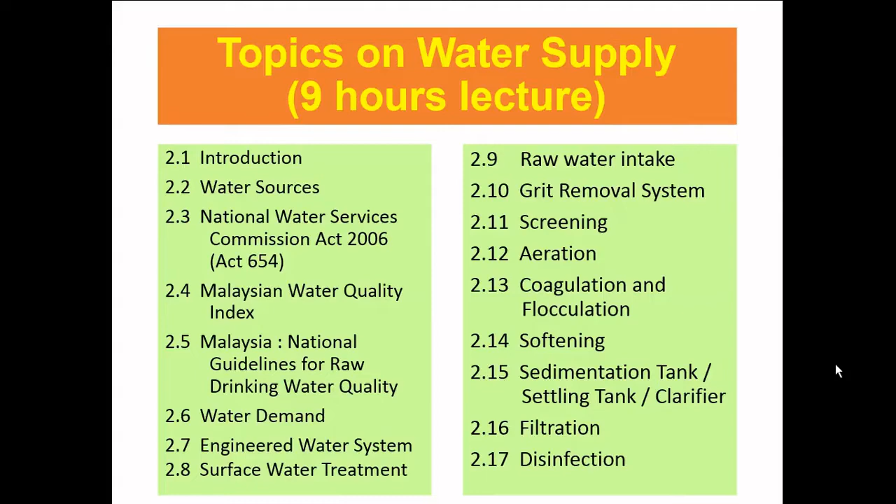So today we continue our new chapter 2 regarding water supply. In this topic we will learn about regulation, standards, and the process of water supply.

Let's see what is meant by 2420 millimeter - it is the depth of water annually, yearly. We will receive about 2.4 meter water depth. If we multiply this with the area in Malaysia, we get million gallons of water sources from the rainfall.

Malaysia's water status is diverse, increasing, and competitive. However, for future forecasting by SMHB Engineering Sdn Bhd, water supply demand cannot be met in many locations, due to climate change, human factors, and degradation of raw water supply catchments due to uncontrolled opening of forest areas.

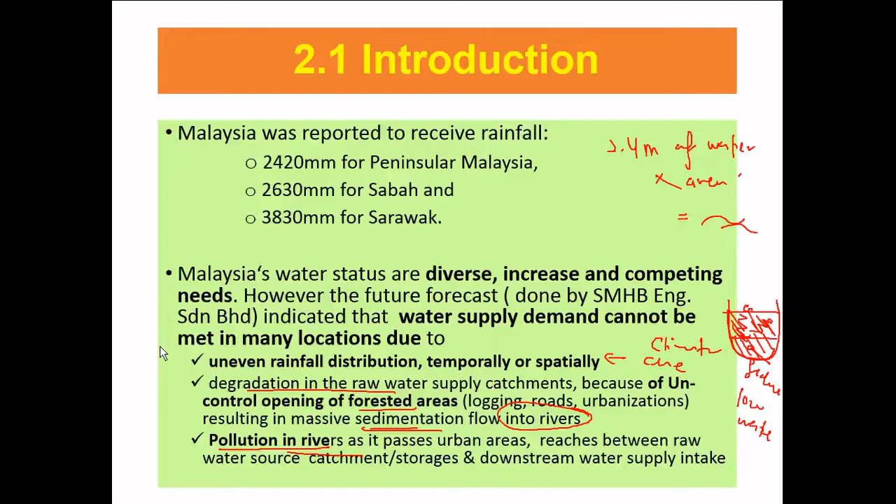In Malaysia, the water crisis happened in 2014. Nowadays in Selangor, I think every year they have a water crisis, regarding river pollution. Treatment plant shutdowns happen due to contamination from river pollution or water intake issues, resulting in low water quality.

Meteorological background - lack of rainfall in the catchment area. This is usually due to climate change.

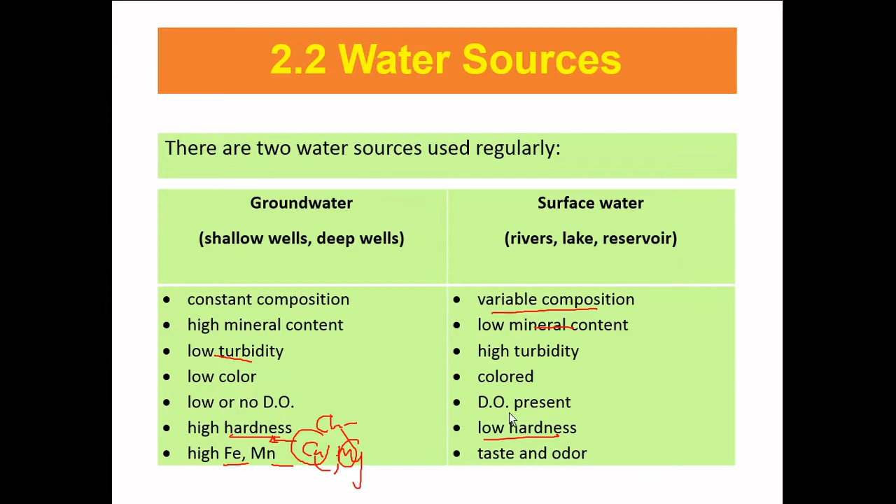So what acts include the water supply? In Malaysia we have Act 2006, Act 654. This act was enforced on 1 February 2007 by the Ministry of Energy, Water and Communication.

Before this, previously in 2007, now we just have KASA, Kementerian Alam Sekitar dan Air. The act was enforced, and the body responsible for this act is SPAN, Suruhanjaya Perkhidmatan Air Negara.

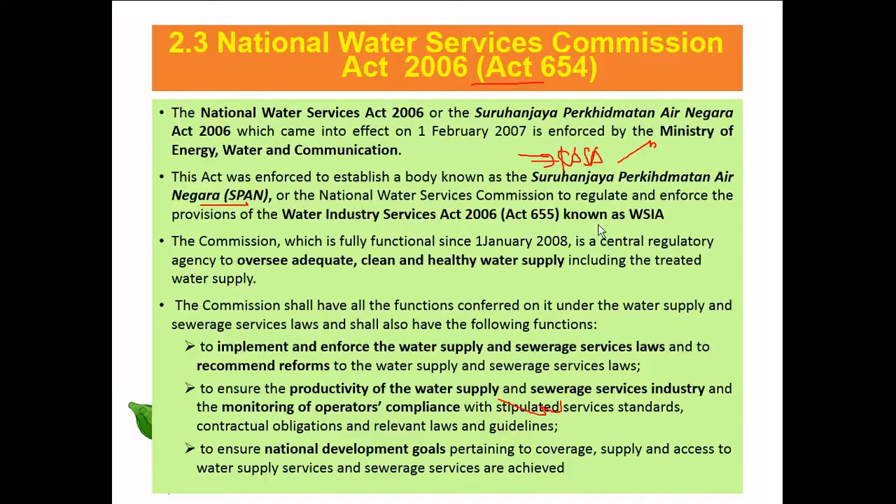The National Water Services Commission regulates and enforces the provisions of the Water Services Industry Act, known as WSIA. The commission fully functioned in January 2008, when this act came into effect, and the body SPAN monitors everything related to this act.

This is the central regulatory agency. The main purpose of this act is to oversee the adequate water volume and quality. The commission should have functions conferred under the water supply and sewerage service, involving two things: water supply and sewerage, ensuring the two important things, quantity and quality.

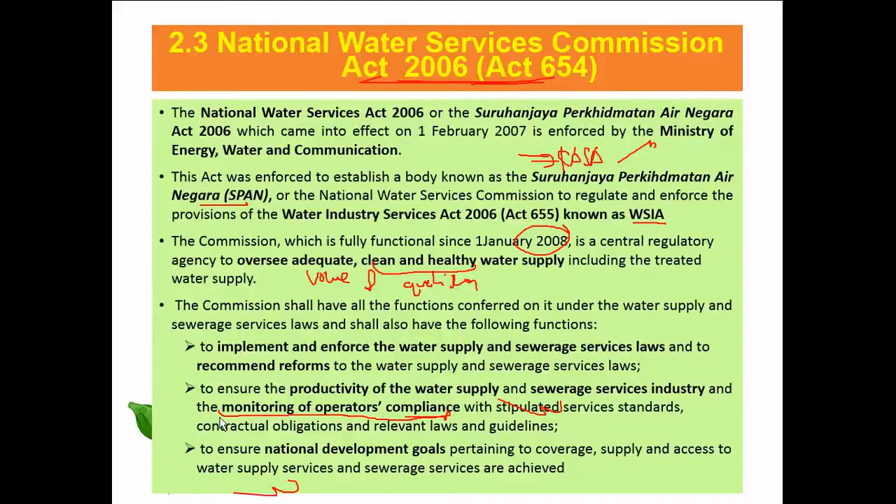Another function is to monitor operator compliance, meaning the tasks or jobs for water supply and sewerage, such as IWK and Syarikat Air Johor, are included in this act. Another purpose is to ensure national development goals pertaining to water supply coverage and access to water supply services are achieved.

WSIA, what is the purpose? To ensure uniformity of law and policy, to make proper control regulation for water supply throughout the Peninsula, Federal, Putrajaya. It doesn't include Sabah Sarawak, they have their own act regarding water supply. Three main subsidiary legislations included are water service industry licensing, permit and exemption.

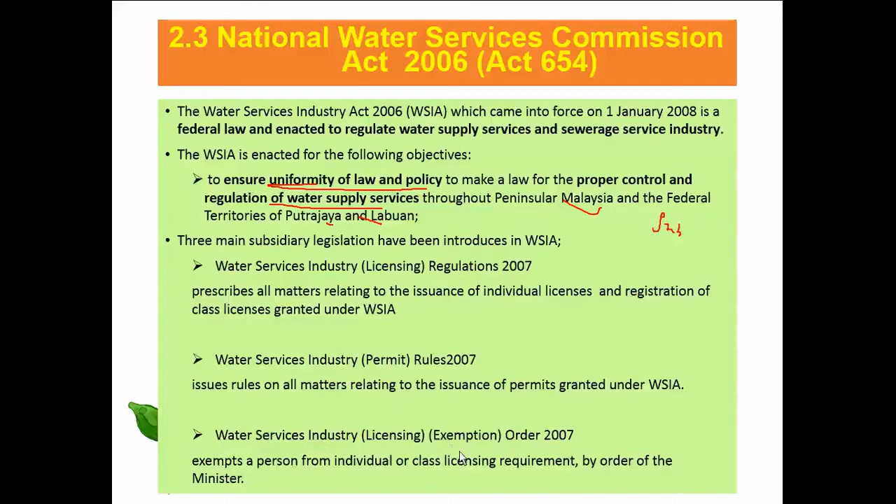Here is the flow chart for Act 2006. We can find the relationship between the ministry and the Suruhanjaya involved in this act. We have two ministries: Kementerian Kewangan (MOF) and KASA. In 2007 we called it KeTTHA. Under KASA we have SPAN. Under Kementerian Kewangan we have PAAB.

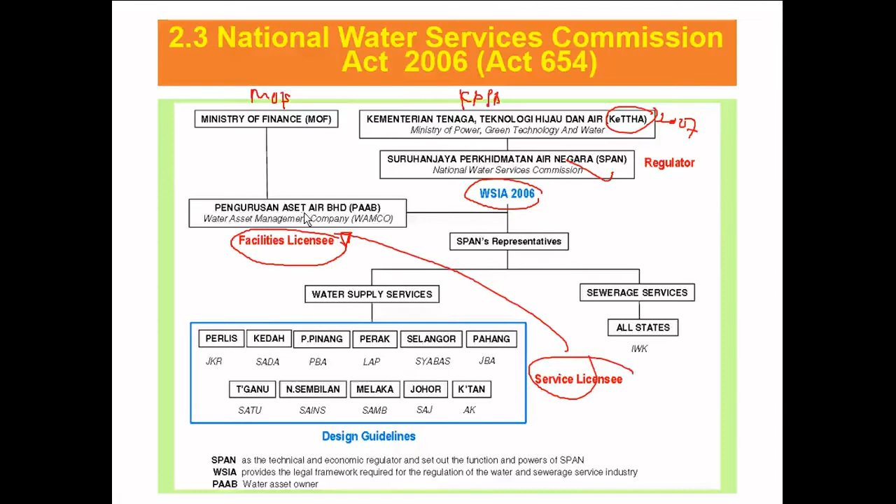Water supply service - here we have the water asset owner. This is the owner of all the water treatment plants, designed and developed by PAAB. This one is only water supply service.

Water supply service is the operator. This is the company that will conduct, control or operate the water treatment plant. They just operate it - the asset is owned by PAAB.

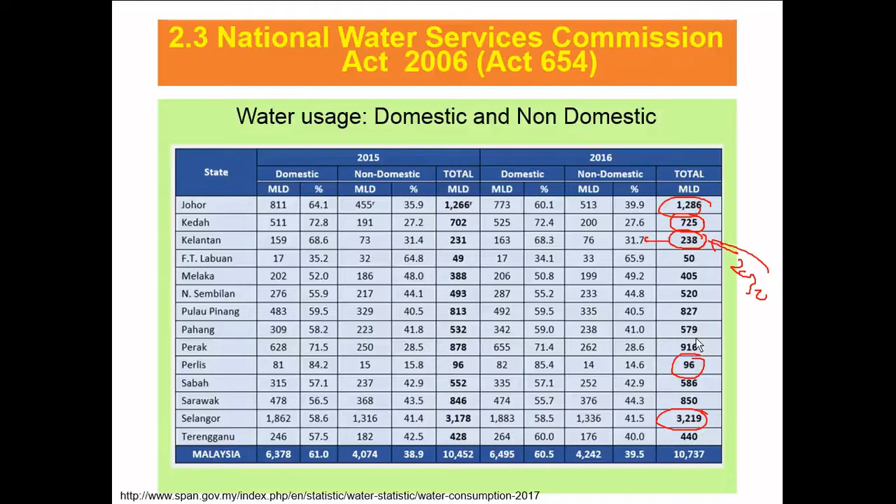Perlis is low because of lower population. This depends on geography and demography.

For water surface - when we want to understand or identify and categorize the water surface, whether it's usable for any activity, we can compute or determine this using the water quality index. The purpose of the water quality index is to know the beneficial use of the fresh water. With this index, what is the purpose, what is suitable for that water to be used for?

The water quality index serves as the basis for environmental assessment of water in relation to pollution, categorized by design class of beneficial use. This one - what category does it fall into? For example this has class 1, 1, 2A, 2B, 3, 4, 5. This is based on the parameter, and this one is based on the index.

If 80 to 100 it's clean, 60 to 80 is slightly polluted, 0 to 60 is polluted. This is class 1, 2, 3, 4, 5. From this class we can determine the beneficial uses - what uses are suitable for the water, what is the purpose.

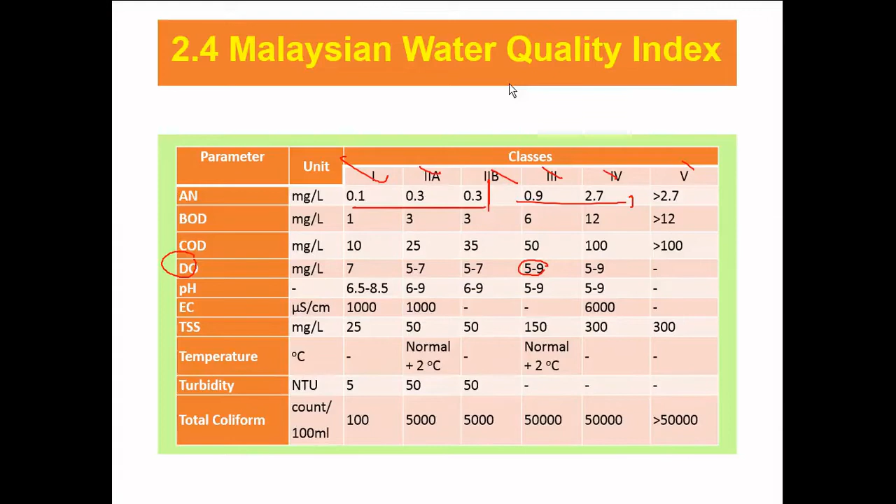So I have this exercise for you to solve. Solve the exercise - they have 2 stations, let's say on a river.

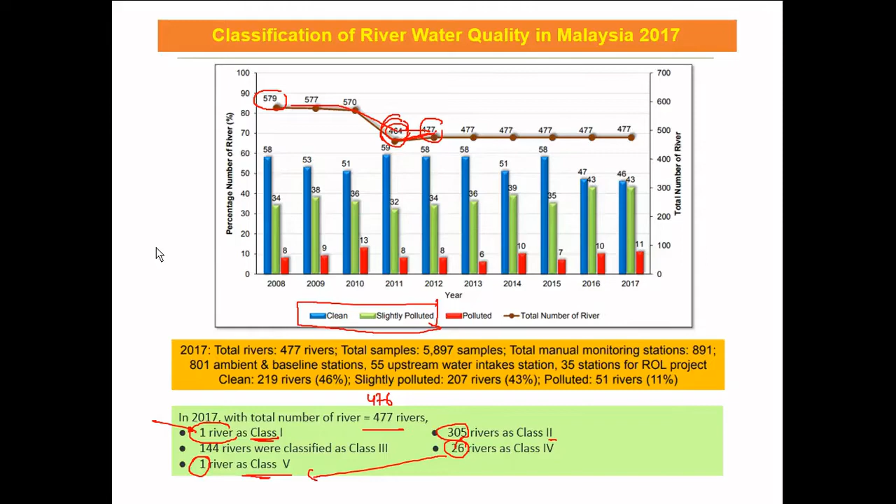5 major types of water pollution are manufacturing industry, agriculture industry, sewerage treatment plant, and large piggery farms - big pig farms. They release sewerage effluent without proper treatment. After the pig farm process, there's waste disposal without proper treatment. They should have an oxidation pond or treatment pond before releasing the water effluent to the water bodies.

3 primary parameters have high impact on the water body: BOD, which is related to organic matter - eating, drinking, waste all contain organic matter. Suspended solid commonly reflects sediment. And ammonia nitrogen.

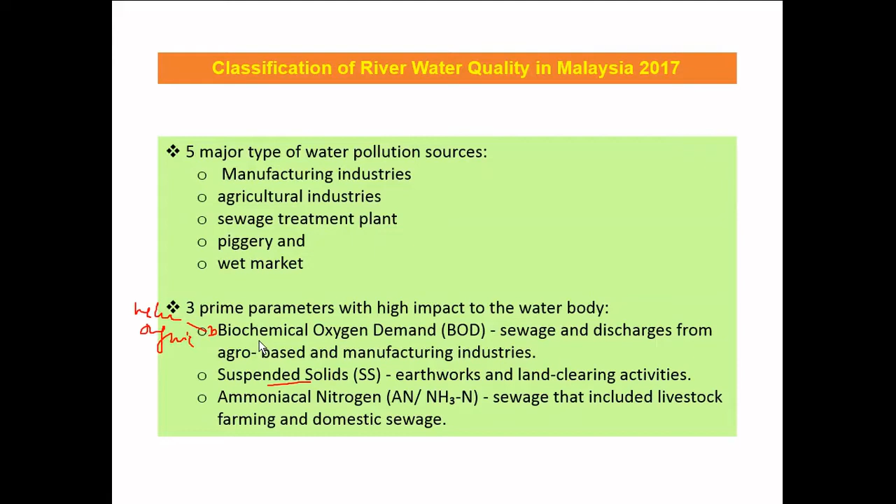Sewerage includes livestock, farming and domestic waste disposal, urine and so on. These have a high amount of ammonia nitrogen.

Here is the treated water quality standard. Raw water means before the treatment plant, and treated water is after entering the treatment plant. For example, raw water comes from the river. We have the river, and here is the treatment plant - the water treatment plant (WTP). They have an intake for water at this river, so the river water must comply with this standard.

That's why when there is certain pollution, let's say ammonia - suddenly there's an ammonia smell, a certain concentration of ammonia - they cannot intake water from this river. So they shut down, close it, and make sure they have certain emergency treatment, like flushing or absorption process to remove the ammonia. After checking the water quality shows no more ammonia in the raw water, only then can they reopen it.

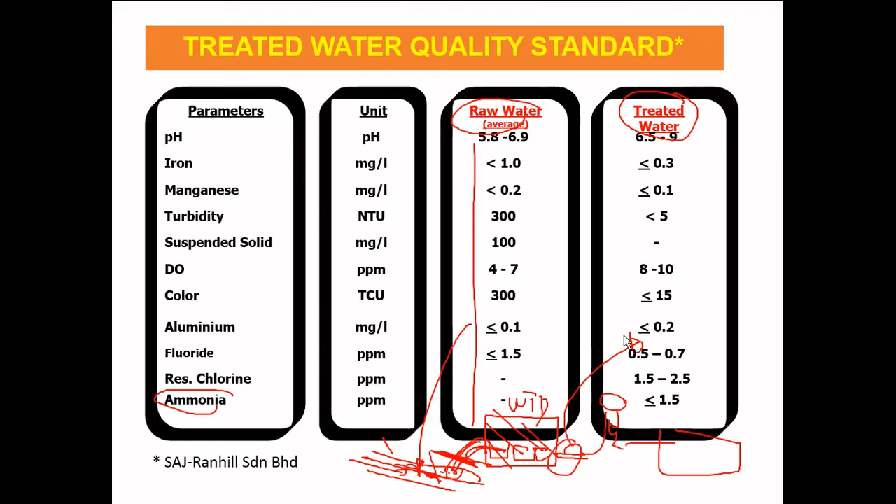For water demand, there are various types of water demand - usage for domestic, industrial, institution demand, public, and fire demand.

Loss in the water we call as... what's the name again... non-revenue water. NRW, non-revenue water. That means the water doesn't give any profit. Non-revenue water means when we have water treatment, we produce and supply to the reservoir, for example 4,000 meter cube, 4,000 meter cube, and supply to homes and so on.

So bila the billing, so patutnya dia 4,000 meter cube. Billing pada kawasan semua yang supply with ni must be 4,000 meter cube water. The billing mesti bill dia 4,000 meter cube, barulah we can dapat kosong non revenue water.

Tapi apabila kita supply water 4,000 meter cube, and then when we billing, kita check water meter, at the month 4,000 release, but at the month we bill hanya 3,000 meter cube. So we lost 1,000 meter cube. Loss ni mungkin disebabkan pipe burst, bocor, leakage, ataupun kena curi. So this one we call as the non revenue water.

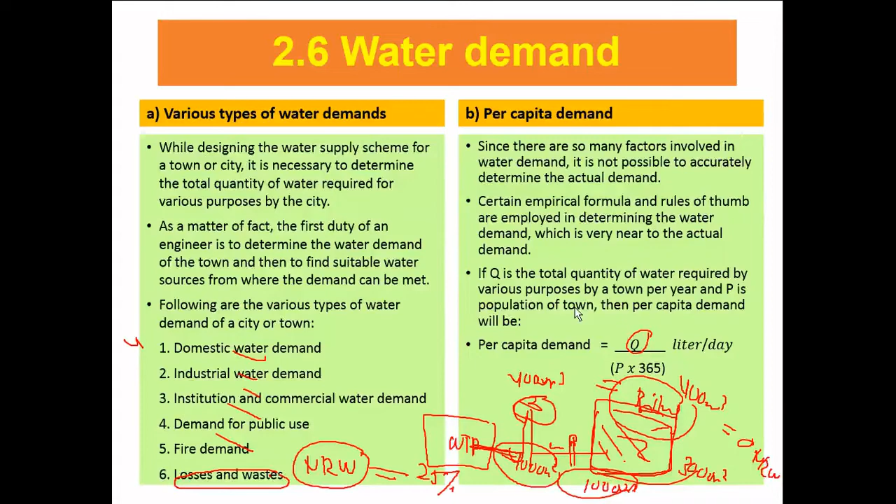So per capita ni depend on the area, lifestyle, urban berbeza, rural area berbeza. Factor yang saya cakap tu, kedudukan size of the city, keadaan quality water supply, cost of the water, local policy, sewerage, all these things will affect the per capita demand, berapa banyak dia guna dalam sehari.

This is the domestic water demand, usually normal condition. Habit, lifestyle apa semua tu akan juga affect the water demand. So normal condition we use between 135 to 150 liter per day. However in developed country figure maybe sampai 350 liter per day, itu sebab dia gunakan untuk others purpose, bukannya untuk diri sendiri saja.

Kalau in Malaysia we assume for each population we use 135 liter per day. This is the detail of the users: drinking, bathing, cooking, laundry, utensil, housing cleaning and toilet flushing. So every people we assume that they consume the water as much as 135 liter capita per day. Capita ni apa, people lah, per people.

So here based on the state, the state depend lah ni 2015-2016, saya try dapat data terbaru 2021 ni pula data berapa, either the consumption per capita per day will be reduced or not. So depend on the state. This value depend on the lifestyle, cara hidup juga menyebabkan penggunaan air tu tinggi dan rendah. Juga service lah, water service, bagus tak bagus, good or not good at the area will be affected to the consumption.

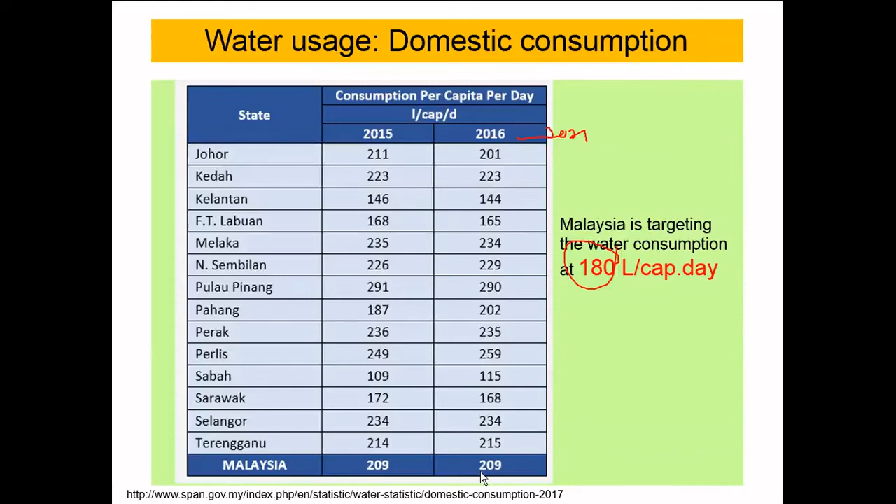So Malaysia target 180 liter per capita per day. So currently 2016 average 209 liter per capita per day.

Industrial water demand, usually they use almost 20 to 25% of the total water demand of the city, and the rest domestic lah. Yang paling tinggi adalah domestic. Domestic paling tinggi, and the 25 adalah total for the industrial.

Institutional and commercial water demand. Apa yang saya maksudkan institutional, universiti, sekolah, and ada tadika ke apa. We call it commercial, macam BP mall apa semua tu as the commercial water demand.

Another important thing is the fire demand. Fire demand is very important. As the emergency, when we have the fire event atau fire problem, so fire demand must be included in this calculation. When we compute for the water demand, fire must be included in the calculation.

If not proper control and extinguishing in the minimum possible time, they lead to serious damage and may burn the city. That's why dalam kita calculation of the water demand for the certain area ataupun development, fire demand ni kena masuk dalam kita punya pengiraan. During the fire breakout, large quantity of water is required, throwing it over the fire to extinguish. Therefore, provision is made in the water work to supply sufficient quantity of water, or keep as the reserve the water meant for this purpose.

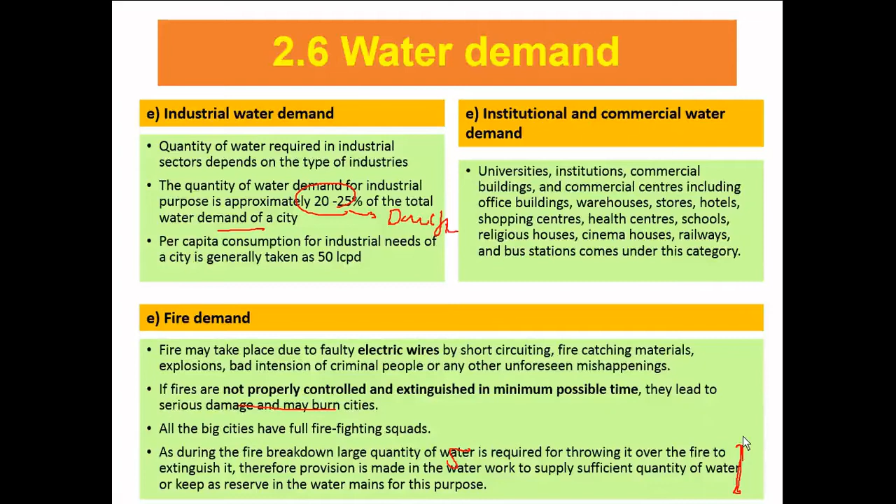So fire demand dia selalu dalam guideline lah. Kalau fire demand ni, kalau you after ni bila you kerja, when you design for the water reticulation.

Okay, so this is one part of the water demand. Water demand depends on the guideline. Usually the city council (majlis bandaraya) has a specific guideline for water demand. But generally we can compute the water demand Q equals 3182 times root of population.

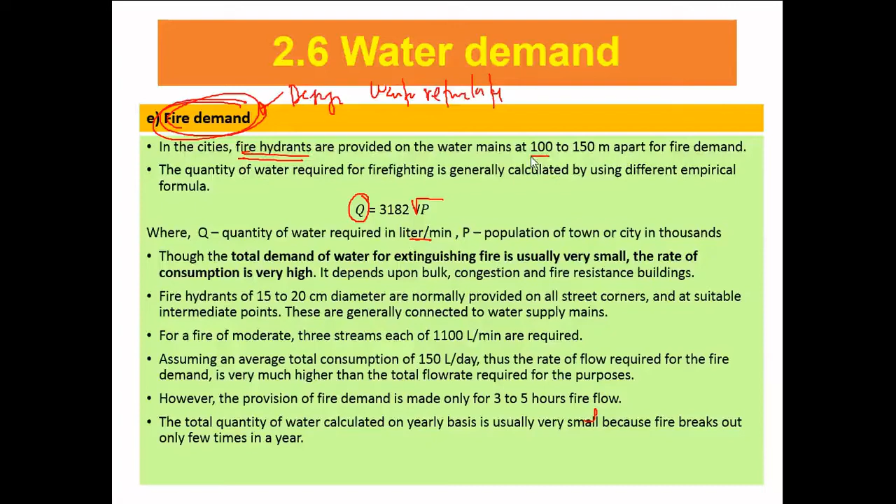So we know what is the Q in the unit liter per minute. Okay, so for the fire demand, the outlet or point of the water demand is the fire hydrant. The fire hydrant must be located 100 or 150 meters apart as part of the fire demand.

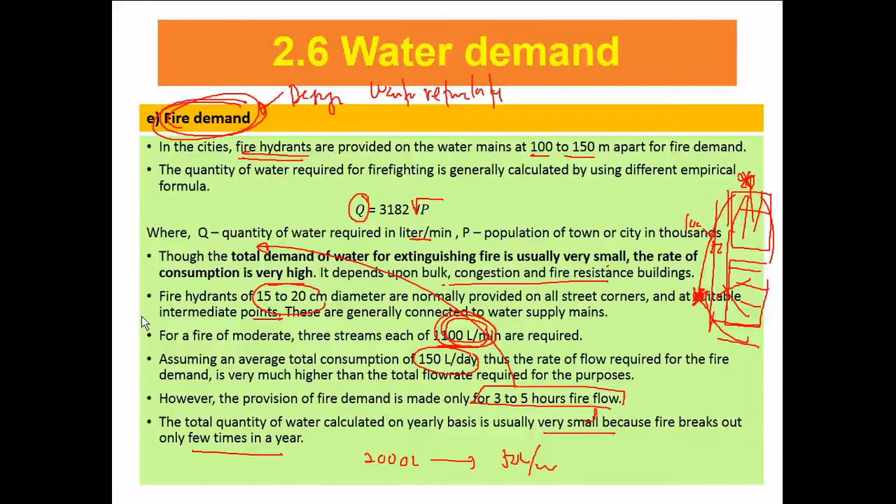Okay, so this is the engineered water system. Let's say we have the water intake, from the stream or the river, to the treatment plant, or from the reservoir. It depends on the water treatment — what is the source.

The source of the water intake depends on the certain area, usually the stream, reservoir, or dam. So these two sources, reservoir and stream, are common in Malaysia.

So after treatment, there is distribution for industrial and domestic use, and lastly the effluent from industry must have pre-treatment and must comply before discharge to the water bodies.

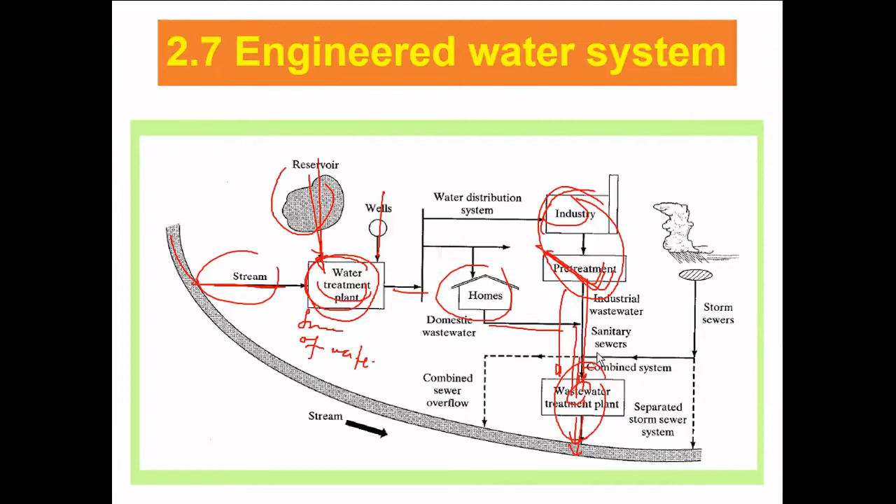For surface water treatment, what is the purpose? First, we want to remove suspended material for turbidity and color. Color is usually due to sedimentation, and we eliminate pathogenic organisms. Treatment technology is largely based on coagulation and filtration.

Here is the standard conventional treatment in Malaysia. From the water supply, they have screening to avoid large wood or stones from entering. Then they have an equalization basin to balance the flow before further treatment.

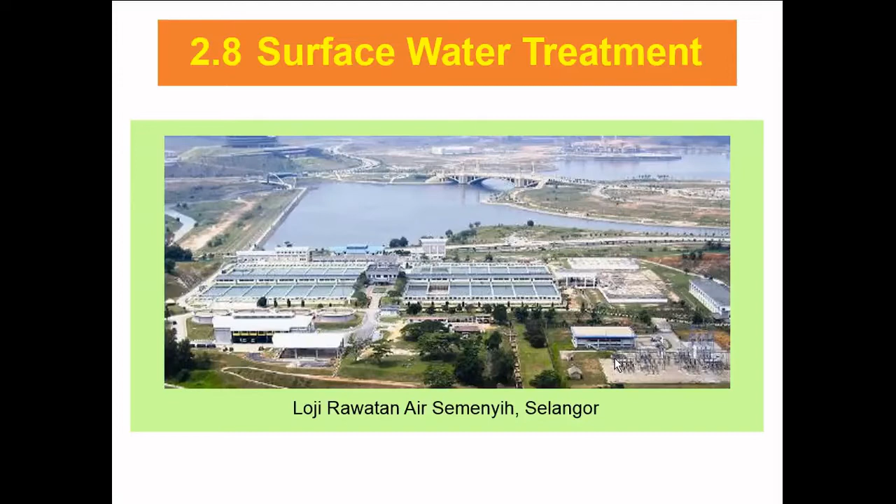Here is a picture of the actual water treatment plant in Selangor. We often hear about shutdowns here because the source is from the river, and when the river is polluted and doesn't comply with the raw water standard, they need to shut down until the raw water meets the guideline.

This is a more detailed picture compared to before, which was general. There's an intake and additional reaction stages, including primary treatment and secondary treatment, before supply to the consumer. We will discuss this in more detail later, including what happens in the pre-treatment, primary treatment, and disinfection, which will be covered in the next topic.

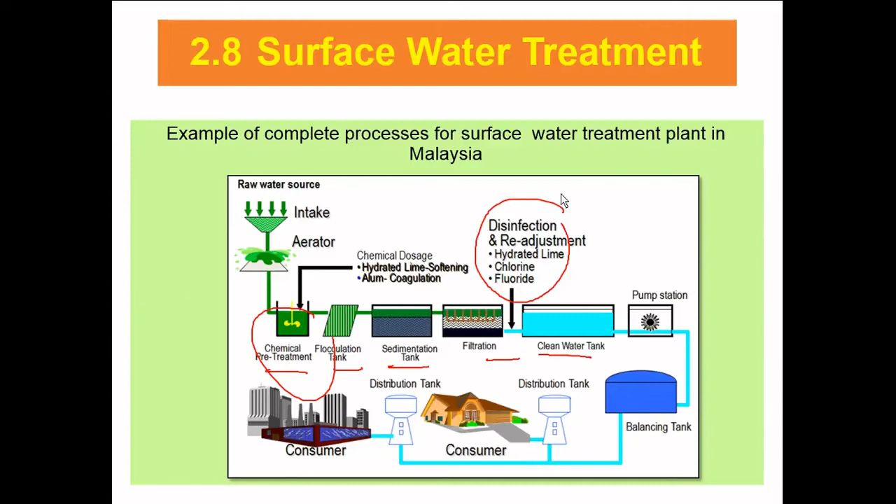In the treatment process, rapid mix means mixing chemicals with the water using a coagulant, which we call alum. The coagulant acts like glue, bonding the small particles together, and after bonding, flocculation occurs.

Flocculation means the particles become bigger solids, which are then removed by gravity through settling, then filtered very fine as I explained earlier. Chlorination is the disinfection step to remove bacteria or viruses.

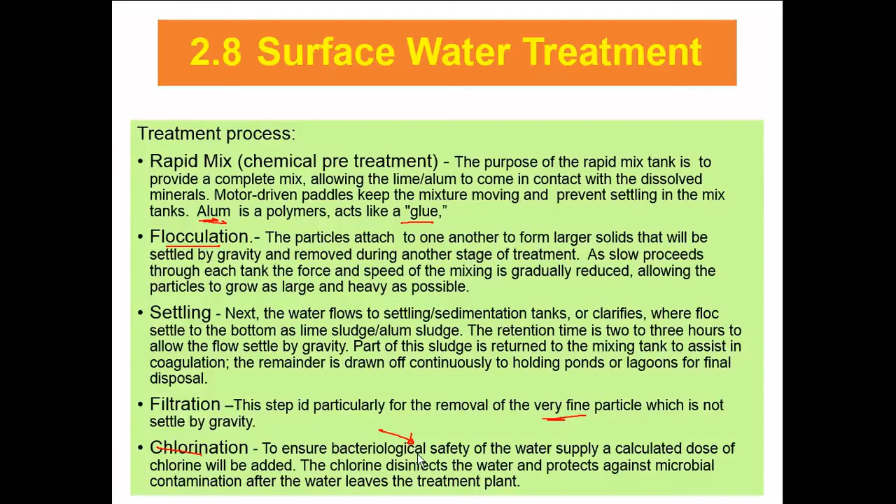Other treatments to consider include pre-chlorine, if there's formation of trihalomethane, and pre-sediment to reduce and settle it, since water from the source may not be very good and needs pre-sedimentation.

Fluoridation is added for dental health. Post-chlorine forms the remaining residual chlorine, which is important to ensure chlorine presence is maintained along the distribution system, so chlorine is still present in the pipes later. Activated carbon removes odor and taste, which is additional depending on the water source and raw water intake.

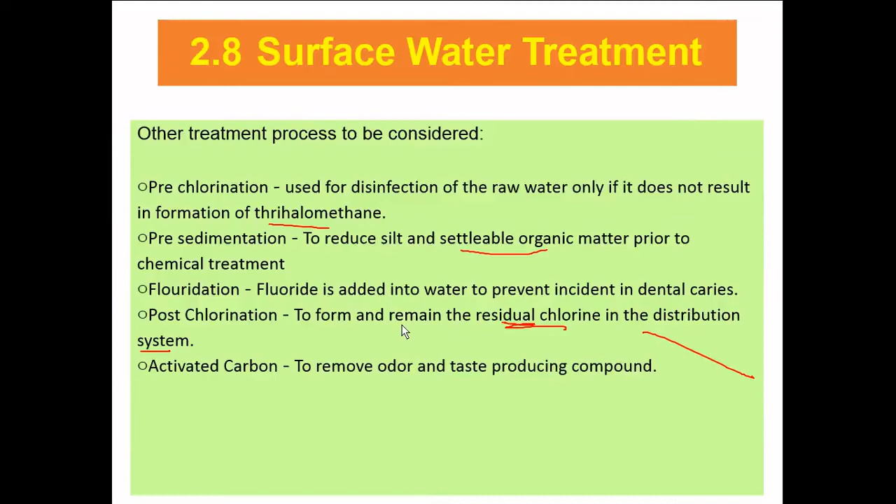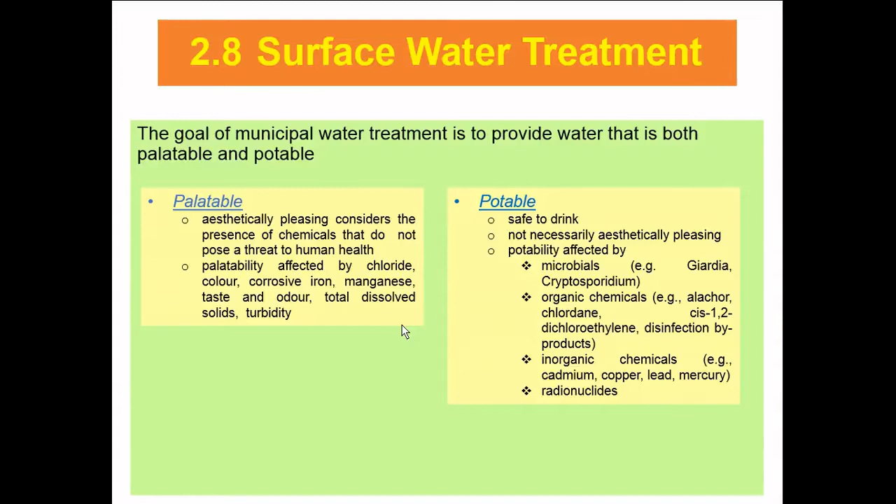This is what I mentioned earlier about raw water. So how can we determine the system or method used for water intake? Water intake is the withdrawal of water, collecting water from the river, lake, or reservoir over a predetermined range of pool levels. If the pool level is low, it needs to be topped up.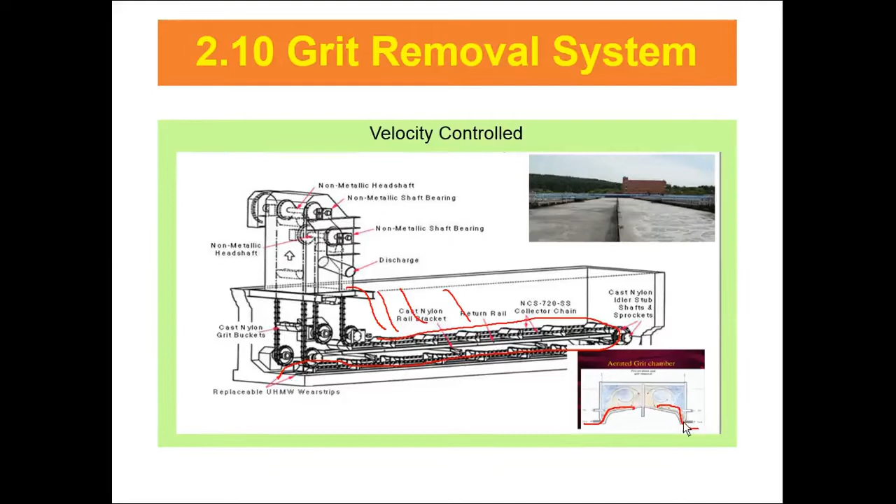So this is the cross section area. For this aerated grit chamber, they provide aeration, and then the flow will go out. The flow of the grit will flow out.

Okay, how we can design the horizontal flow for either rectangular or square grit removal systems. So this is the standard design or guideline for the grit removal system.

So cross section area for each unit. Cross section A equals Q design divided by VH for each unit. So VH must be approximately 0.3 meter per second, and depth between 1 to 1.5. Assuming TD, detention time between 1 to 2 minutes, to determine length equal to VH times TD.

Okay, so let's say you have the rectangular grit removal. So A here is the cross section area. The view from here, you view here, the A viewed from here. So this one we call the cross section area.

So Q is the flow inserted into the system, the flow rate into the system. So VH here is the velocity, horizontal velocity. So this is the air flow in the grit chamber.

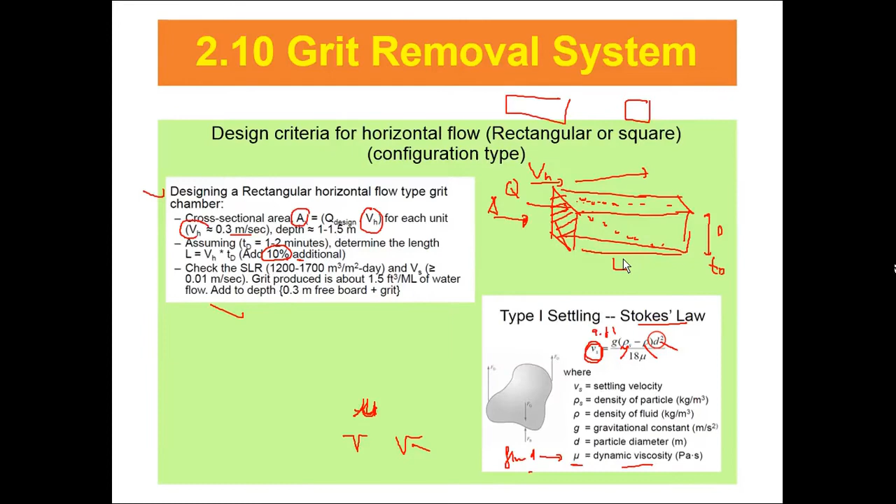So here they given the 20 degree. From the 20 degrees you can find the water properties to determine the density of water and dynamic viscosity.

This is the design requirement: the depth must be 1.5 times the width at the maximum flow. So depth D or H equals 1.5 W. This is all the information given in the question, so you need to design the grit chamber.

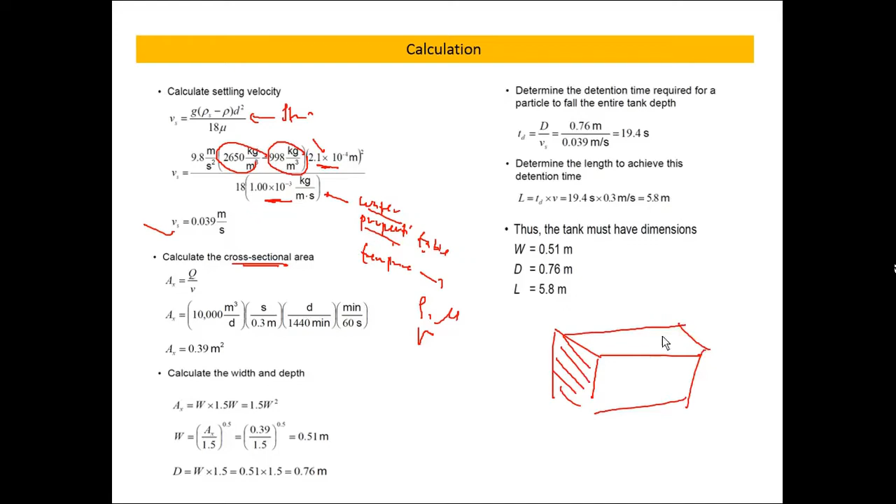Okay, so this one settle, you can get the velocity, calculate the cross section area. The cross section area I already described previously. So here, this area, we call the cross section area, not this area, not the surface one. This one we call the surface area. So you need to differentiate between the cross section area and the surface area.

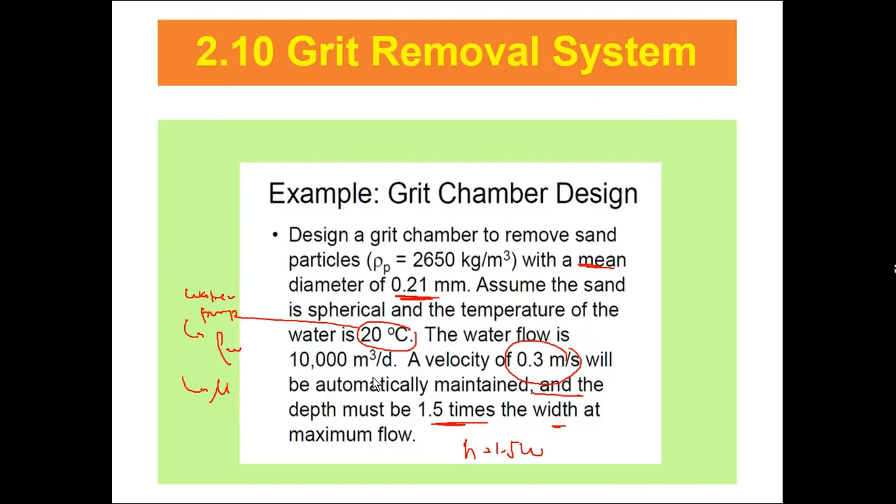So calculate the cross section area, AX here, equals Q divide by V. Q is already given, V is the velocity, horizontal velocity 0.3. So A equals Q, Q is 10,000 meter cube per day, divide by 0.3 meter per second. You need to convert the unit from day to second so you can get the area.

Surface area, cross section area is 0.39, and the requirement said H must be 1.5 times the width. So area equals width multiplied with the height or depth. H is equal to 1.5, so you plug it in here and you get 1.5 W squared. Solve for W, and you get W equals 0.5.

After getting W, you can solve for the depth, so W multiply by 1.5 gives you the depth. So the settled width is 0.51, height 0.76. Now, how do we determine the length?

To determine the length, we need to determine the detention time, for the particle to settle down. Let's say this is the particle inlet, so how long do they need to settle down to the bottom of the chamber. This one we call the detention time for the particle, TD. When you compute for the particle, you can determine the TD, how long the particle will take to settle down.

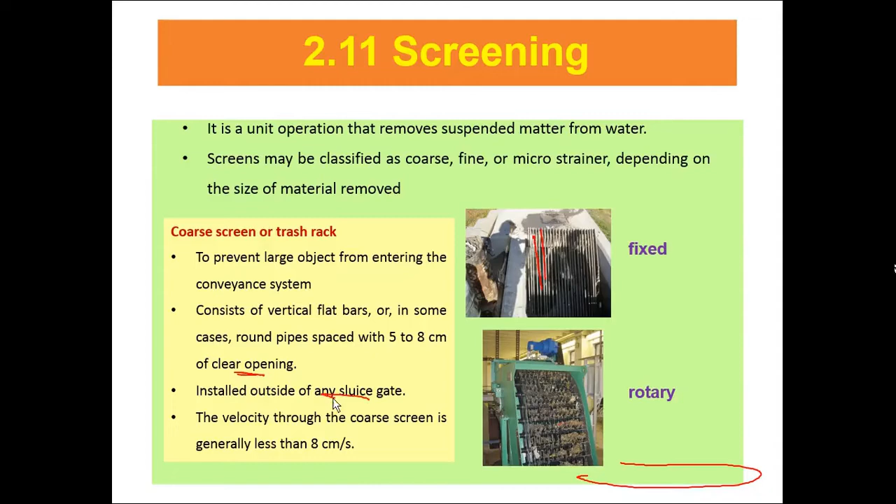This is just information about the rotary screen, showing how they collect. This one is the screen bar, the red one is the screen bar. So water, the particle will be trapped here. There's a rotary that removes and collects all the trapped objects, as shown in the picture. So it flows and traps here, and the rotary removes the solid particles.

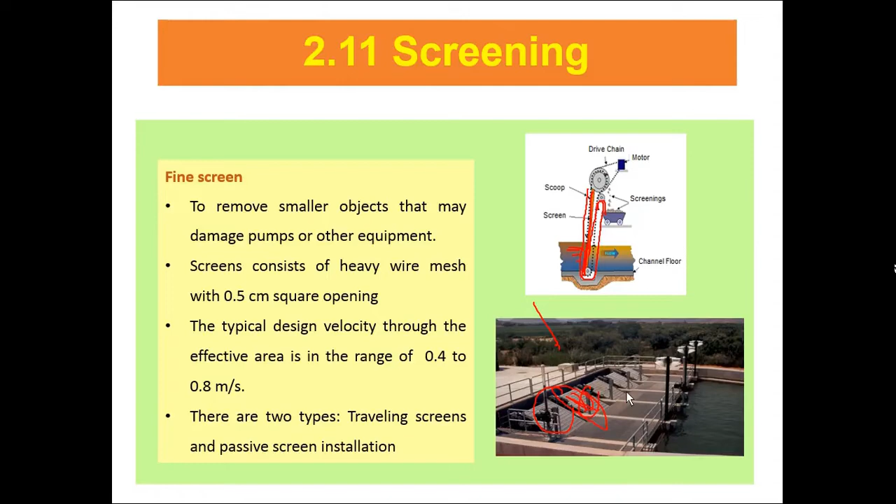So after that, we do the aeration. What is the purpose of aeration? To reduce the concentration of taste and odor causing substances.

By volatilization, to oxidize iron and manganese, rendering them insoluble. In surface water, the value of iron and manganese is not too much, but in groundwater the concentration of iron and manganese is sometimes higher than in surface water.

Aeration also dissolves oxygen in the water to make it taste better, so they increase the DO in the water, and to remove compounds for better water treatment - hydrogen sulfide removed before chlorination, and carbon dioxide removed before softening. They need to remove both compounds before entering the water treatment.

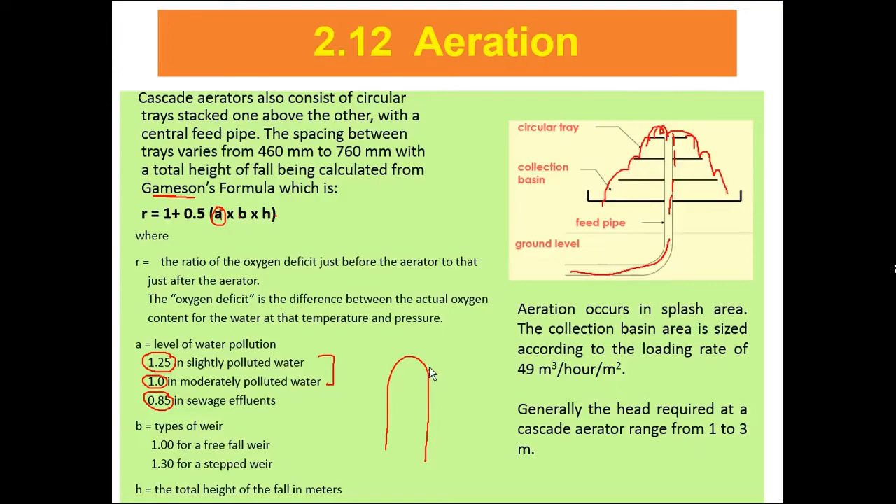H is the total height of the fall in meters. Aeration occurs in the splash area. The collection basin area is sized according to the loading rate guideline.

Generally, the head required for the cascade ranges from 1 to 3 meters. Head represents the pressure - water can move up to 1 to 3 meters. Head is usually in meters, representing pressure. The pressure required for aeration is usually between 1 to 3. So P equals rho G H, where H here is 1 to 3 meters.

Now for R - R is the ratio of the oxygen deficit, the oxygen usage just before the aerator to just after the aerator. So DO here before aeration, and DO after aeration.

So we need to subtract before and after. Usually DO before is lesser than after, since after aeration the water is already enriched with DO, so DO must increase higher than the DO before.

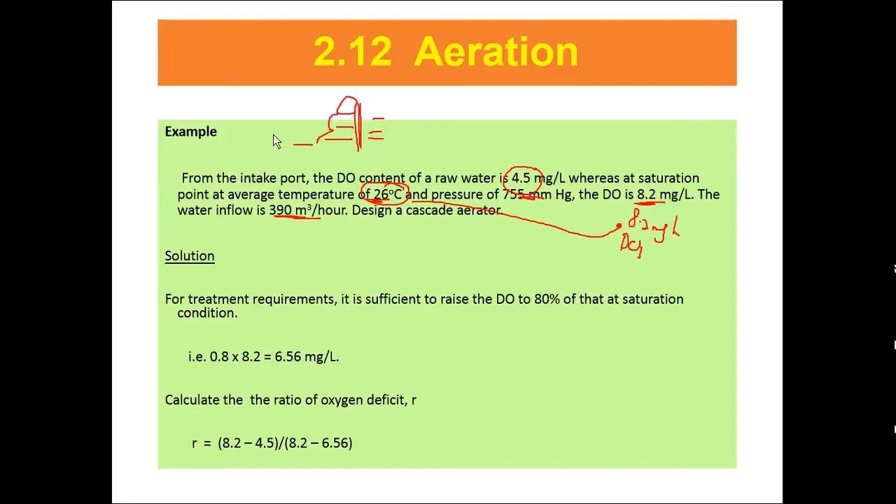So the first step is to determine the target - what is the target final DO after aeration. So what is the final DO after aeration, and what is the volume?

Usually we look at the standard, which must be in the range between 6 to 7. So for the easier way to meet treatment requirements, we use 80% of the saturation DO. This is the guideline or standard you can use to determine the DO after aeration - use 80% of the saturation DO.

Okay, saturation DO is 8.2, so you multiply with 0.8, so this is the target. This is the target for the DO after aeration. So you can calculate the ratio of the deficit.

DO saturation minus DO initial, divide by DO saturation minus DO final. Okay, this is before aeration, this is after aeration. So you can find the deficit.

So apply the Gameson's formula. R already known, R is the ratio you already got, and then A, B you can determine based on the coefficient given in the page here. Slightly or moderate. Here we use 1.3 because we use stepped. 1.25 is the slightly pollutant. So commonly we can use the slightly pollutant rather than moderate.

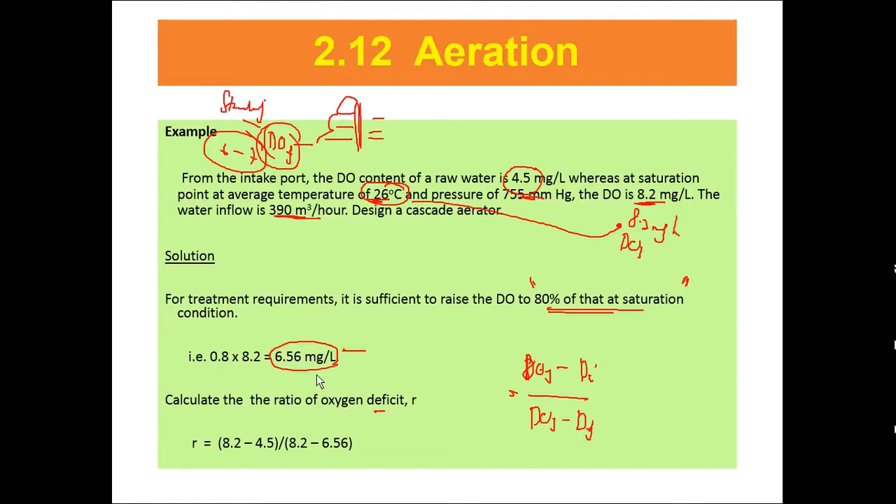Slightly pollutant depends on the type and condition of the water. This one doesn't mention whether the water intake is moderate or slightly, so since there's no mention, we use the slightly. And finally you can get the height after you plug in all the known values.

So the height is 1.5 meters. This is based on the standard guideline, 49 meter cube per hour per meter square. So the flow rate, loading divided by flow rate, you can get the area, which is 7.95, because the design request is for the circular. So pi d squared divided by 4, and then you can get the diameter from the equation. So the height, diameter 3.2, the height 1.55 meters. Okay, this is how you design for the aerator.

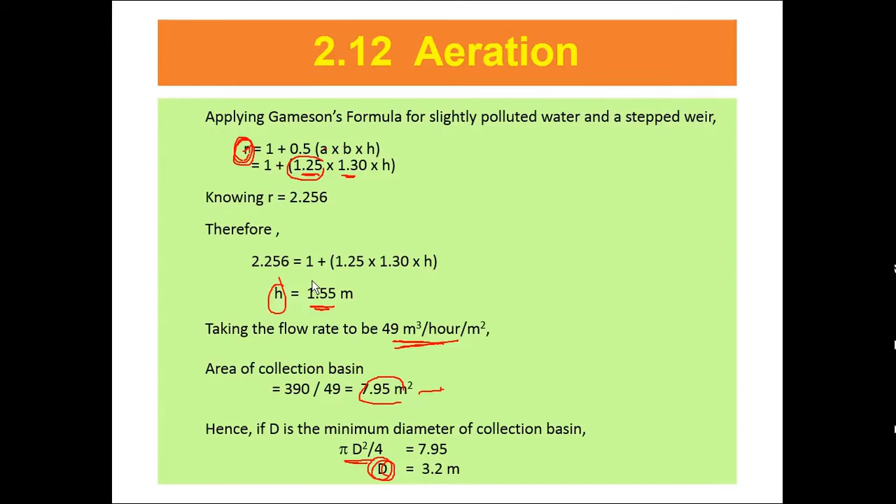Okay, so we've settled grit removal, so you know what is the purpose of the grit removal, and then we proceed to the aeration. So what is the use or importance of aeration besides enriching the DO? There are 2-3 more reasons why.

And then we proceed to the next step, coagulation and flocculation. As we know, surface water contains organic and inorganic particles. For organic particles such as clay and colloid, they remain in suspension without aggregating for a long period of time. Therefore, the particles cannot be removed by sedimentation. The particles are charged negative and stable in nature, meaning they exist in the ionized form. The size of the colloid or particle is between 0.01 to 1 micrometer.

So too small. So how can we remove this particle? Given this size range of the particle, that's why it's important to use the coagulation and flocculation process in water treatment, because we need to make sure the small colloid or particle will become bigger through the coagulation process.

So when we increase the size and density, they will be able to settle down in the sedimentation tank. So the coagulant is added, positive and negative, so the size will become bigger and more dense. This is the process of coagulation.

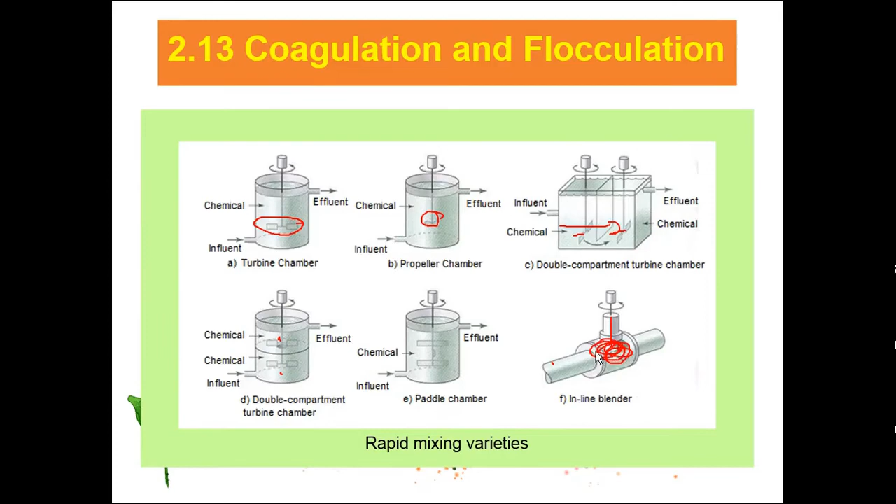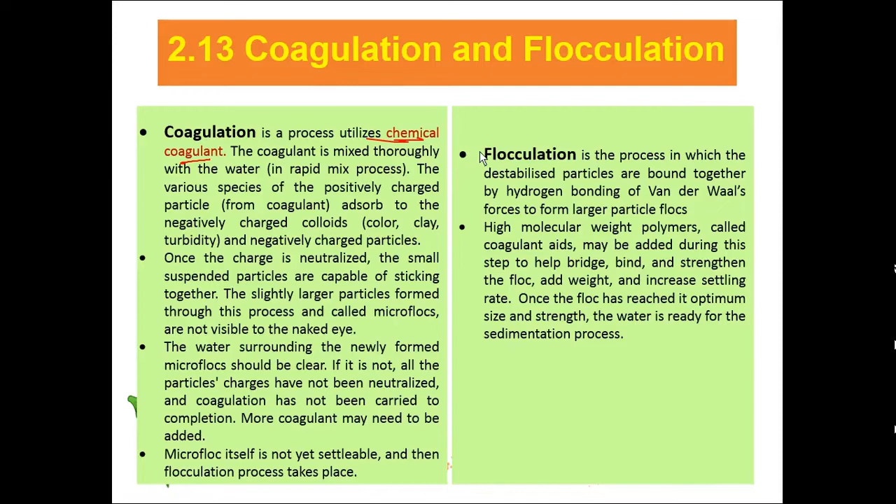Coagulation is a process that utilizes chemical coagulant. The coagulant is mixed, and then positive and negative charges react. The microfloc itself is not yet settleable, and then flocculation process takes place. So coagulation and flocculation are interrelated - they need each other to make sure the whole process will be complete.

Flocculation is the process in which destabilised particles are bound together by hydrogen bonding or van der Waals force to form larger particles, high molecular weight polymer, or coagulant aid as we called coagulant previously. This step helps bridge, bind and strengthen the flock, add weight and increase the settling rate. Once the flock has reached the optimum size, the water is ready for the sedimentation process.

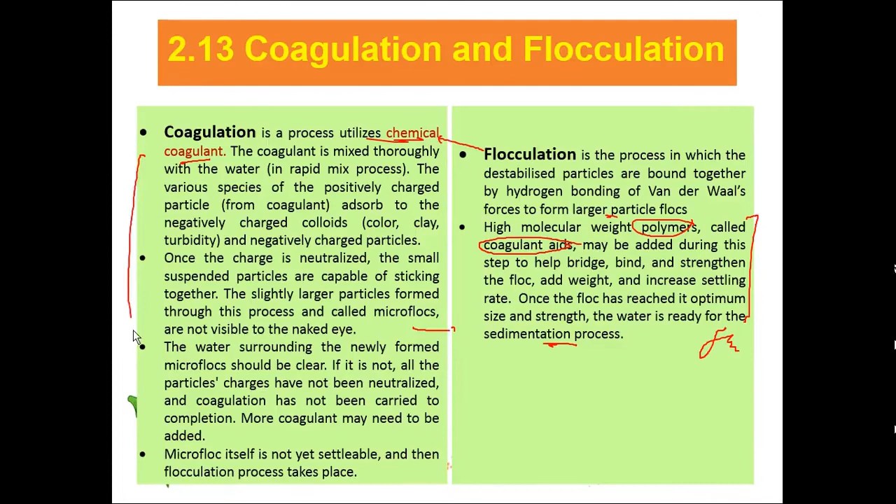So this we call flocculation - after positive and negative charges react between each other, they create the flock. The flock becomes bigger by hydrogen bonding or van der Waals force. This is what we've already discussed in the figure. So let's add some important notes here.

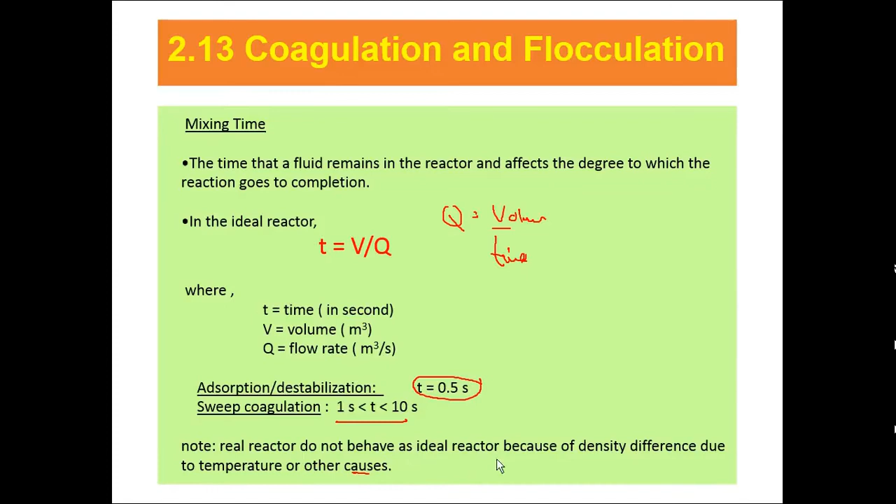For the mechanism of adsorption or destabilization, the time must be around 0.5 seconds. For sweep coagulation, the time is between 1 to 10 seconds. A real reactor does not behave as an ideal reactor because of differences due to temperature or other causes - it cannot achieve the ideal, so it changes, and there may be variations in the reactor.

Mixing equation is included because of the dispersion of the coagulant in the raw water - we want to disperse it to make sure the coagulant will be distributed in the water better. The dispersion of the coagulant into water is called flash mixing or rapid mixing. Rapid mixing aims to produce high G.

Common alternatives for mixing when the mechanism of coagulation is adsorption and destabilization include diffusion mixing by pressure water jet, inline mechanical mixing, or inline static mixing. Common alternatives for mixing when the mechanism is sweep coagulation also apply.

So there are two mechanisms as explained previously - first is adsorption destabilization and second is sweep coagulation. The time differs: this one is 0.5 second, and this one is 1 to 10 seconds.

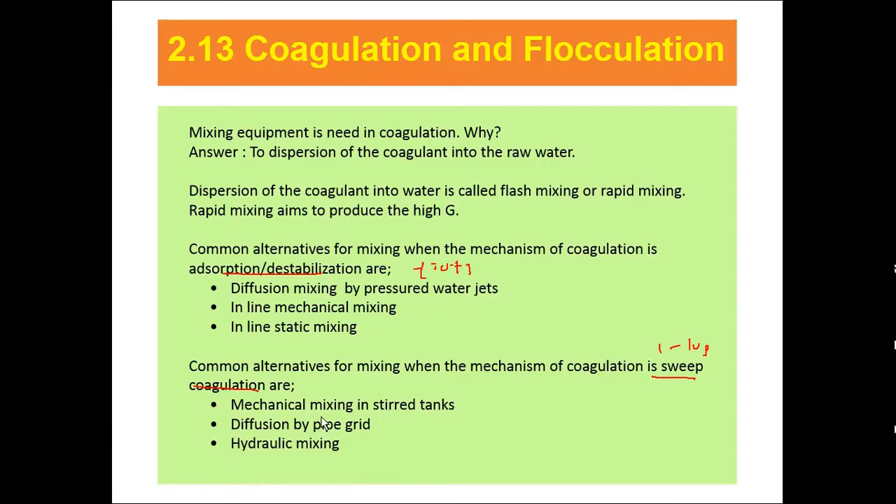Okay, so we need to use the mechanical mixing in stirred tank, diffusion by pipe grid, or hydraulic mixing. Okay, G, velocity gradient. Efficiency of the mixing is depending on the velocity gradient and mixing time. This is the two factors important thing in the mixing for the coagulation.

Velocity gradient can be thought of as the amount of shear taking place. For the coagulation, G, velocity gradient must be high enough. When the chemical is added, the different G should be taken into consideration. G and T already explained, time.

So G between 3000 per second or 5000 per second. For the sweep coagulant, 600 per second or 1000 per second. Different chemical requires different velocity gradient.

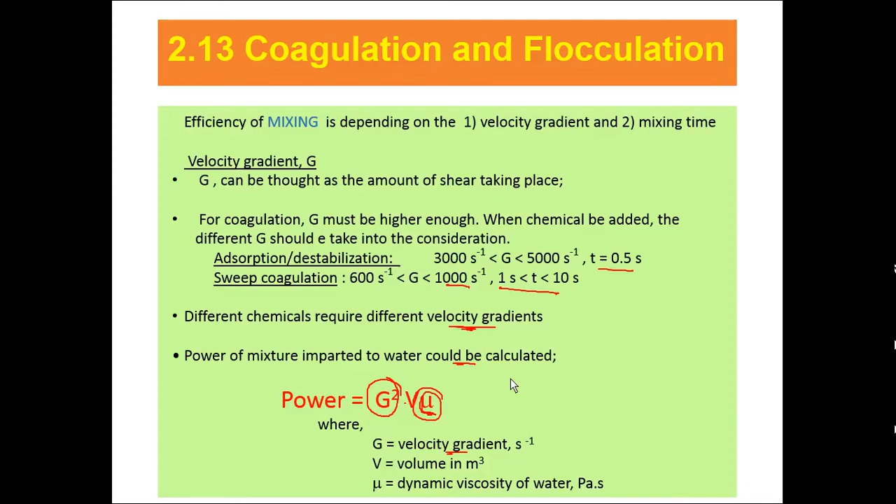So power of the mixture imparted to the water could be calculated. G, velocity gradient, multiplied with volume, multiplied with the dynamic viscosity. This one you can find in the water properties. Okay, the example.

The rapid mixer is used for the diffusion of the coagulant to achieve this. So the important thing is the mechanism. What type of mechanism do they want to achieve? This one, they want to achieve the adsorption and destabilization reaction.

Second one is the sweep coagulation. So there are two mechanisms. Either one: if it's adsorption destabilization, you know t equals 0.5 second.

Calculate the power given velocity gradient 2000 per second. So power equals G squared times volume times mu. G is given, and volume you can determine by using this formula: volume equals Q multiply T. T is already known. For the adsorption and destabilization reaction, T equals 0.5 second.

The Q given is 300 million liter per day. So you need to convert the unit: liter, million liter per day, convert to second, and liter convert to meter cube. 1000 liter equals 1 meter cube. Then mu you can find in the properties, and then you can get what is the power required to mix the coagulant to achieve the adsorption and destabilization reaction.

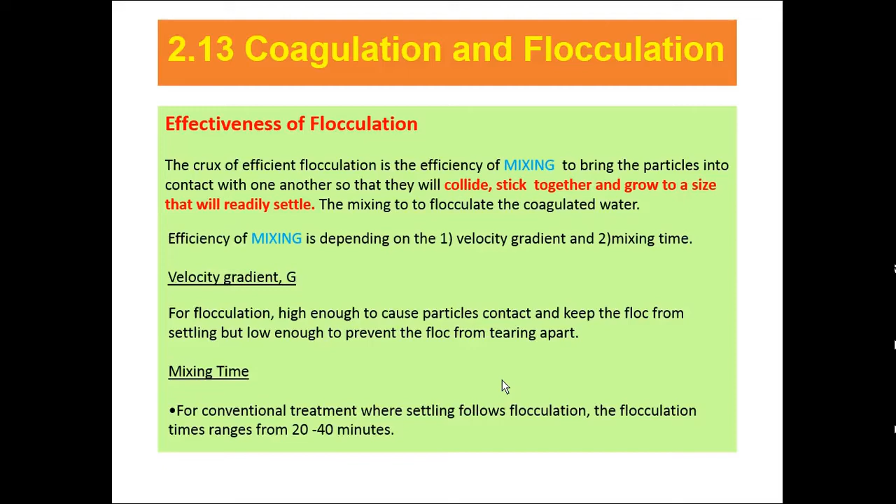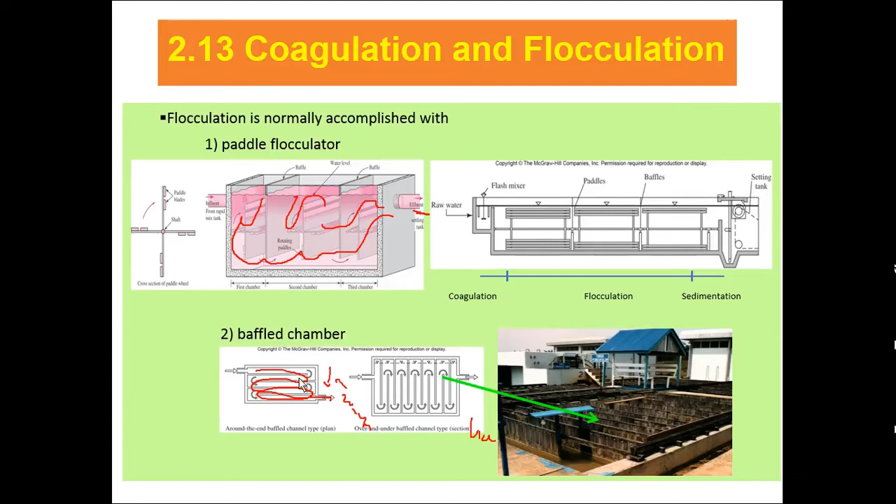This is the baffled chamber. You look in the video, this type. So air will pass through. They have the longest length because they want to achieve 20 to 40 minutes of settlement, and then the flocculation will settle down.

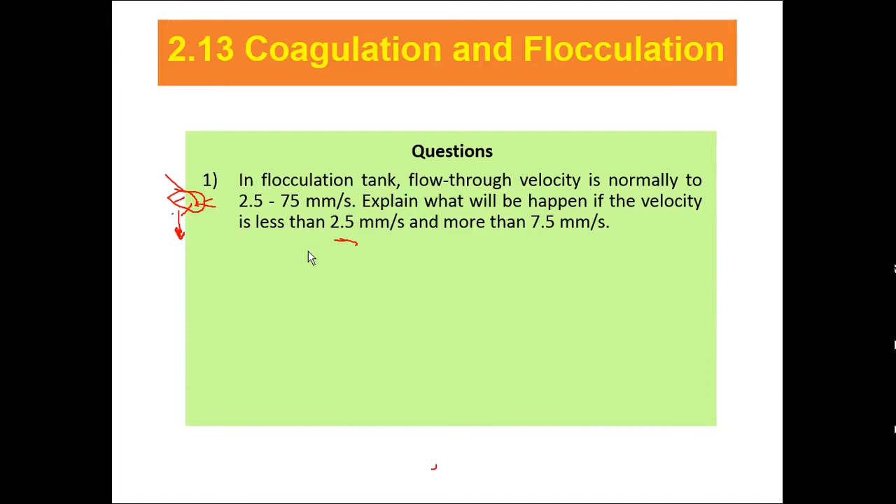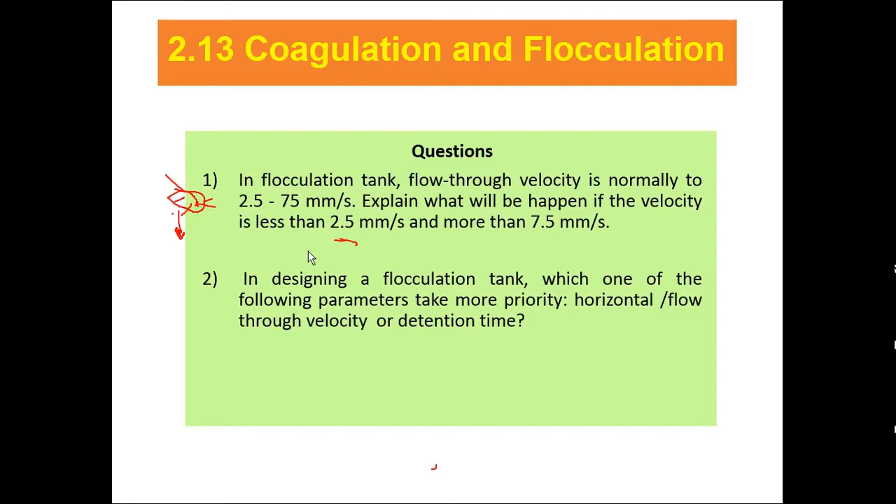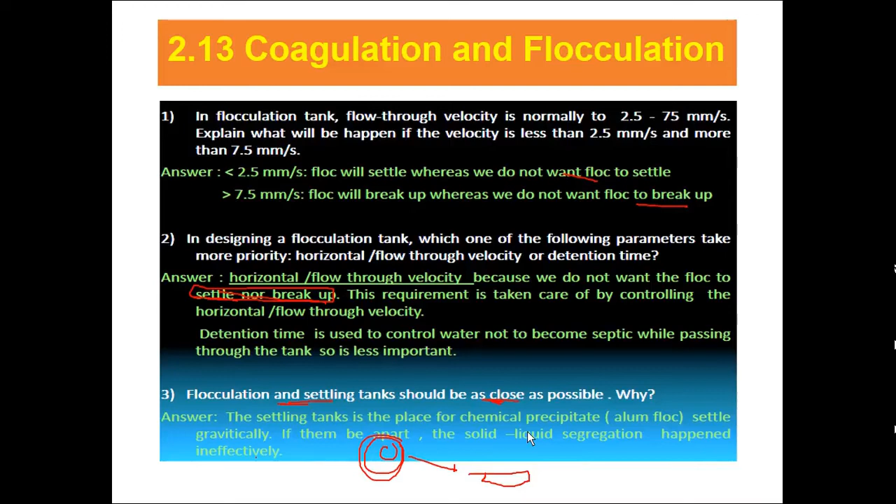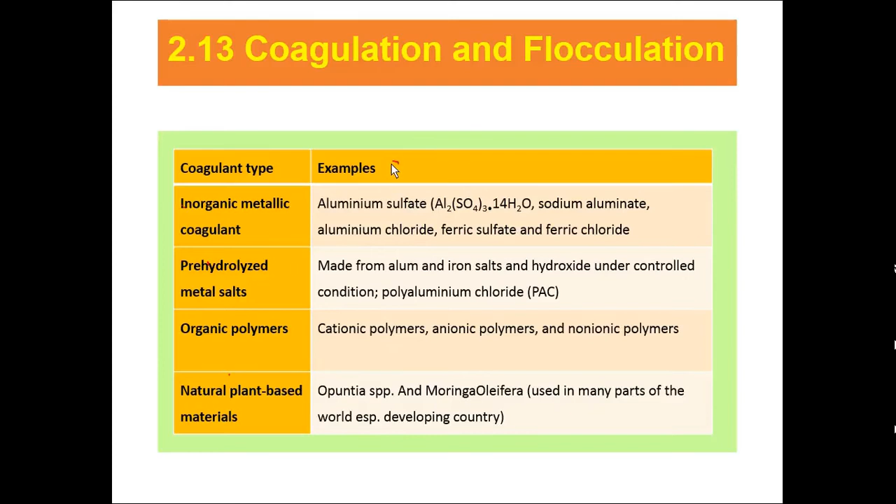So how does alum work? With sufficient alkalinity in the water, alum flocculates and settles in the flocculation process. So alum needs enough alkalinity, and it produces 6 moles of carbon dioxide. So they will produce enough carbon dioxide. The above reaction shifts the carbonate equilibrium and decreases the pH. However, as long as sufficient alkalinity is present and carbon dioxide is allowed to evolve, the pH is not drastically reduced and it's generally not an operational problem.

So the pH is important. That's why they say carbon dioxide is important for the carbon dioxide balance.

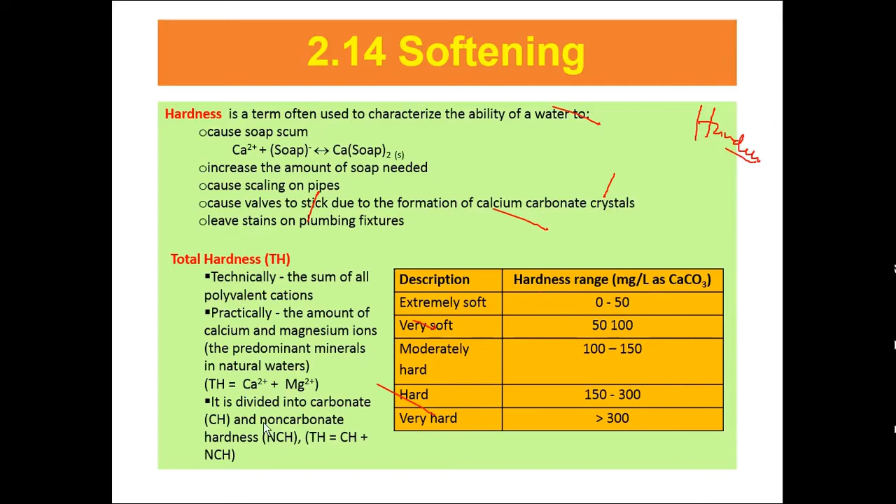Okay, so hardness we've already covered before. What is hardness? It's caused by precipitation from topsoil contacting rock, which creates the hardness. We explained this in chapter 1, related to hardness. We discussed hardness in chapter 1, so you already know what is total hardness, non-carbonate hardness, and carbonate hardness. This was already explained in chapter 1. Carbonate and non-carbonate hardness you already know, because hardness and softening are related - if you have hard water, you need to do water softening. The examples of how to determine total hardness, carbonate hardness, and non-carbonate hardness were also discussed in chapter 1.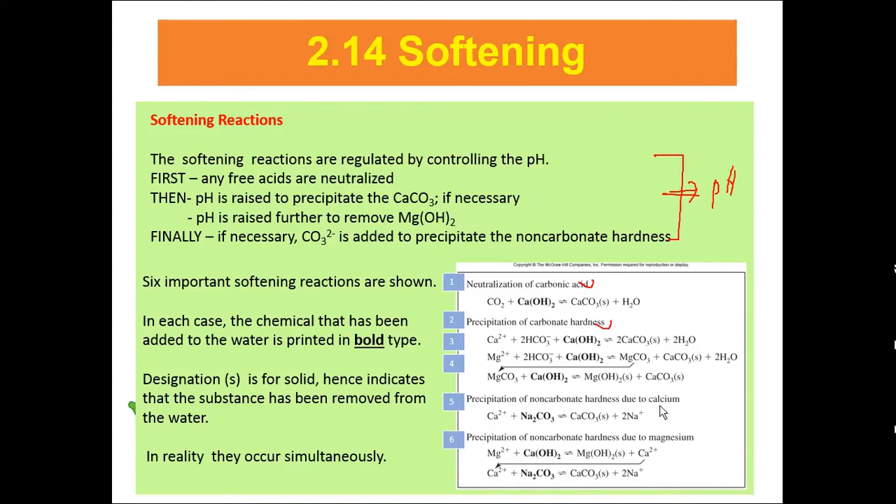The softening reactions are regulated by controlling the pH. First, any free acid is neutralized. Then the pH is raised to precipitate calcium carbonate. If necessary, the pH is raised again to remove magnesium hydroxide. Finally, if necessary, carbonate is added to precipitate the non-carbonate hardness. This is the process for softening, so the main parameter is the pH, controlled by increasing and lowering its value. Okay, six important softening reactions are shown: neutralizing carbonic acid, precipitation of carbonate hardness, and precipitation of non-carbonate hardness due to calcium and due to magnesium.

Magnesium is more expensive to remove than calcium, so leave as much magnesium as possible in the water. Let's say the standard requirement for magnesium is 200 mg per liter. So when we design for softening, we just meet the standard.

To remove non-carbonate hardness is more expensive because we must add carbonate or soda. Therefore we leave as much non-carbonate hardness as possible in the water - the meaning is the same, leave as much here. So we just comply with the standard.

Traditionally the total hardness is set at 75 to 120 mg as calcium carbonate. However, due to economic constraints, many utilities will operate at total hardness of 140 to 150 mg per liter as calcium carbonate.

Concurrent removal of other species - natural organic matter, turbidity and other metals - is limited because of the solubility of calcium carbonate and magnesium hydroxide. Ideal mixing is prohibited, some hardness ions remain in solution because there is insufficient time for the reaction.

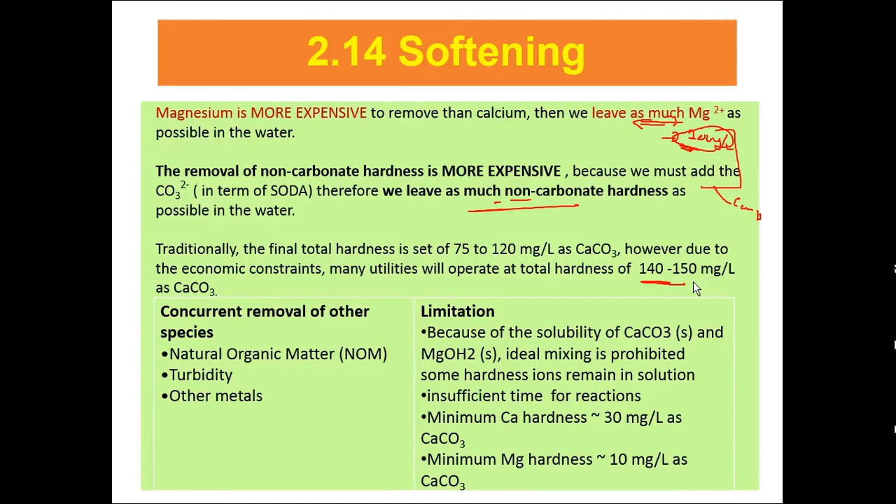Minimum calcium hardness is 30 mg per liter as calcium carbonate. Minimum magnesium hardness is 10 as calcium carbonate. So we leave it in this form, this value.

This six step process we discussed previously: neutralize carbonic acid, add lime to neutralize any free acid. No hardness is removed in this step - the first step, neutralizing carbonic acid, no hardness removed yet.

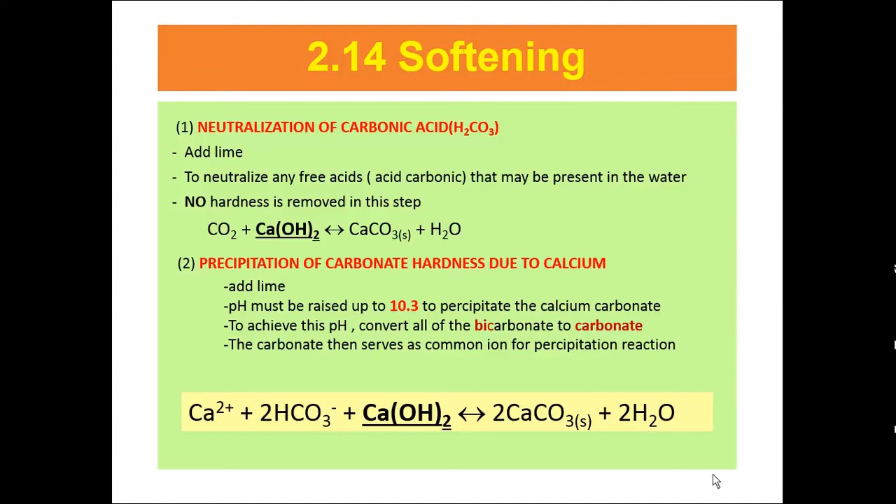Then we precipitate the carbonate hardness due to calcium - this step is where carbonate hardness starts being removed. So precipitate the carbonate hardness due to magnesium as well.

Add lime to increase the pH to about 11. The reaction may be considered to occur in two stages. The first stage occurs when we convert all the bicarbonate to carbonate, and in the second stage we add more lime.

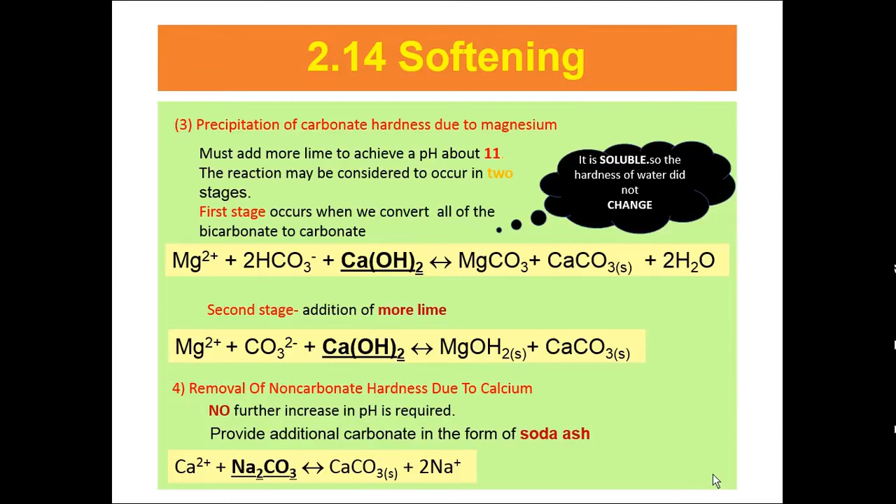Lastly, remove the non-carbonate hardness due to calcium. No further increase in pH is required, so we just add soda - additional carbonate in the form of soda. The first step is removal of non-carbonate hardness due to magnesium, add lime, then eliminate for calcium, add soda.

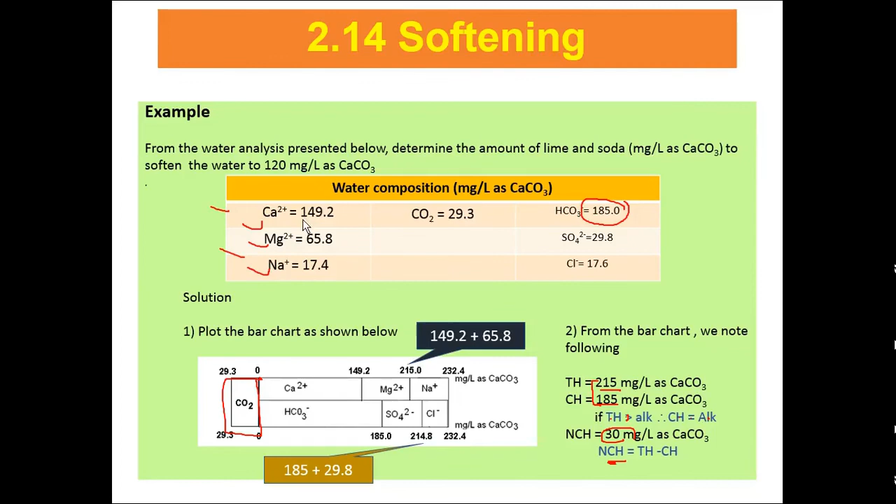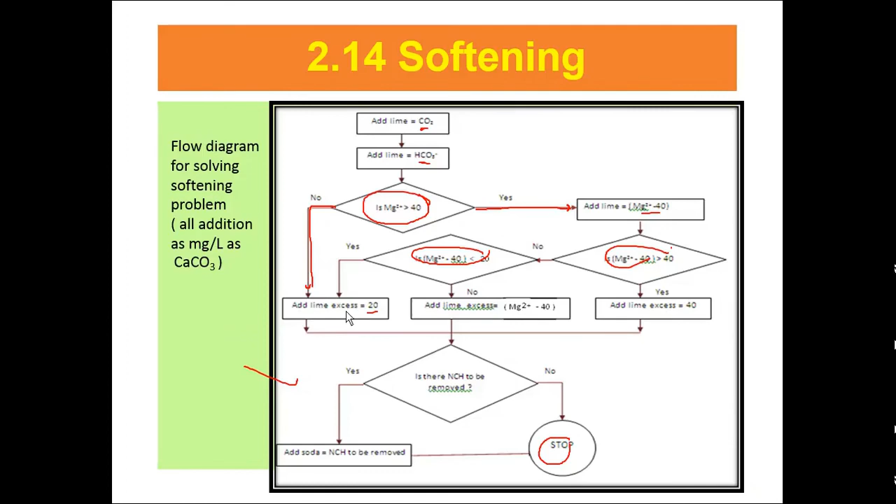So the total is 265.9 milligrams per liter as calcium carbonate.

So calculate the non-carbonate and how much is left to remove. What is the final desired amount required?

This indicates there is no need to remove non-carbonate, so no soda is required. If the answer is positive, then you need soda. So you can add more.